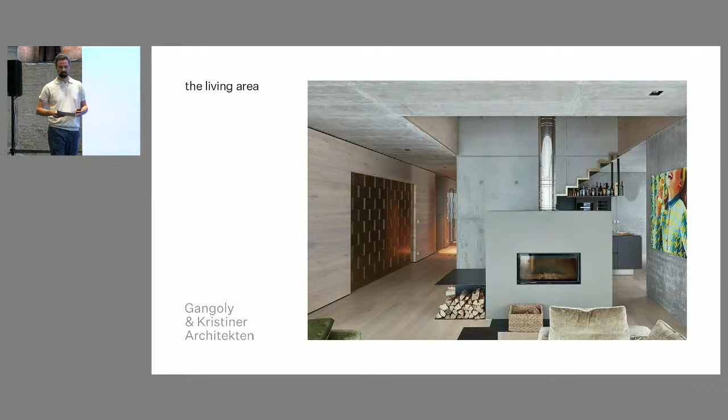We used this brushed brass contrastive material in the kitchen, as well as in the background of this double sliding door that connects a media room to the living area. It's a velvet room with its own distinctive atmosphere and coziness.

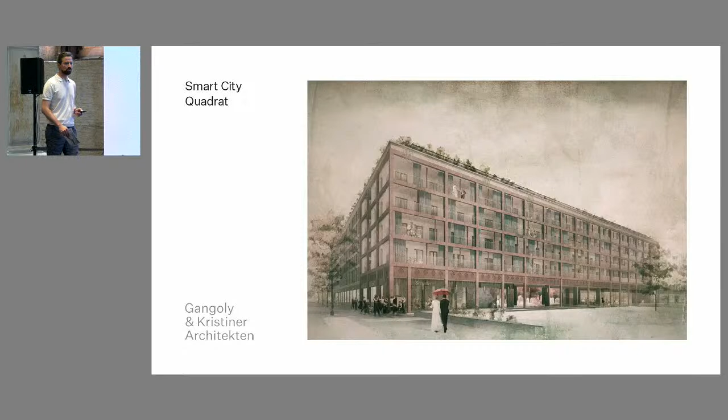And I want to finish up with this project. It is a housing project that we planned together with Ortner & Ortner Baukunst in Vienna. It is 115 apartments as part of a bigger district development.

And on the intersection of those two building parts, we situated this roof terrace for the housing community on top, a green oasis in addition to the park-like surrounding landscape. And these little atmospherical accents on the building corners are lights, two lanterns facing the street side. This image actually stands for a certain atmospherical, decorative detail that is always really important in our work, an atmospherical density that is always part of our projects.

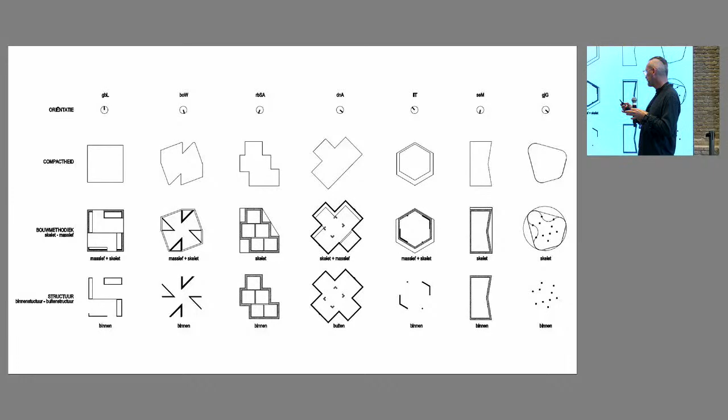So some new buildings I will show you, sustainable experiments and research, a lot of geometrical forms, houses I think BLAF is known for, just because of the different ways of constructing in hybrid structures, very compact, on a small way.

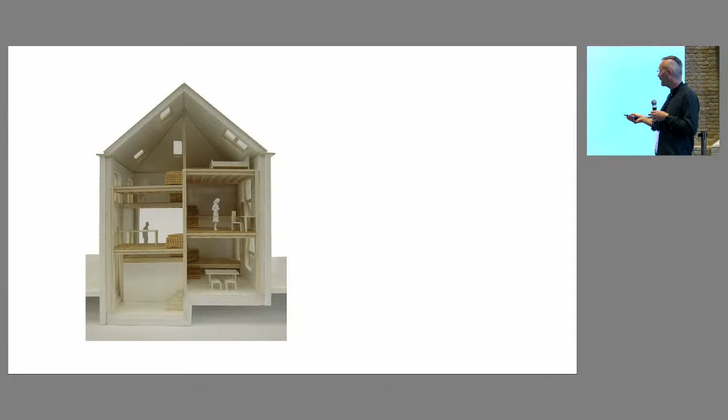Outside, inside. So brick is something special because all the passive houses were made with a really thin skin. But in Belgium, we have a lot of brick houses on the outside. So we started investigating how we can build in a hybrid way with a very light wooden structure in existing buildings, how we can make those kinds of houses ready for the next 100 years.

With a lot of research into new technology in a low-tech way. So this is an example of every house we build in a different kind of way, different ways of building a wall. So this is, we put it together in terms of years.

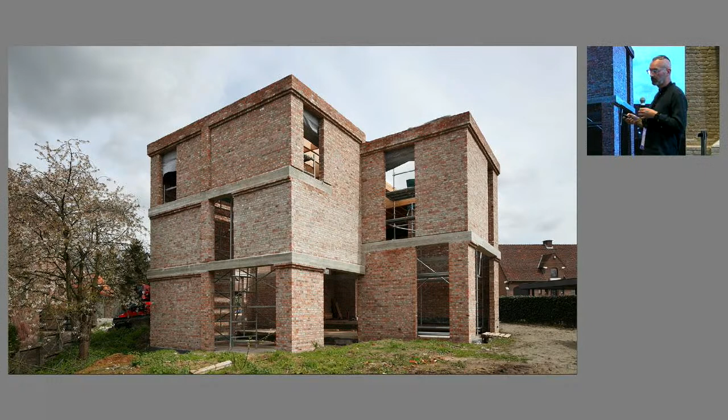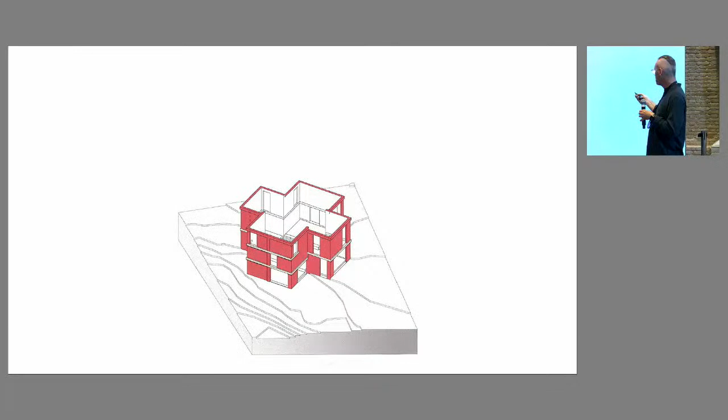And then in brick, we first started to reuse brick because there is a lot of it in Belgium. So we wanted to make a statement that not only in renovation, but also in new buildings, we can build in the same way. So this was the first one, the dnA house. We first built the wall, and then the roof, and afterwards like a decor, and in the interior, the wooden light structure.

Some other buildings with the reused brick on the outside and the wooden structure on the inside. So we come to the glG house.

It's more forest-like, beneath an autostrad. It's built in a first geometrical way because of keeping space between the trees. That's why it became the form, because of the trees around it.

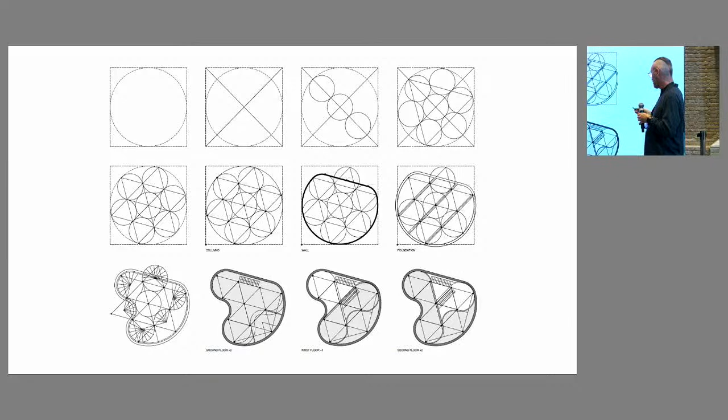And then the steel and wooden structure, a three-storey house. Also important was the brick for the acoustics from the autostrad above it. And yeah, just the plans, but the pictures tell a lot.

Just for the feeling, the outside and the inside are like the same. The man of the house, he helped a lot with the steel structure himself.

Okay, so afterwards we started to develop our own bricks, just to make the curved house also become a self-bearing structure. So we are looking now for developing bricks which carry themselves, apart from the wooden inside.

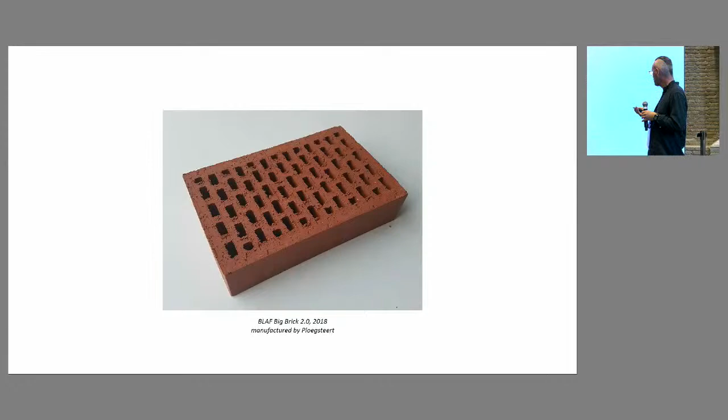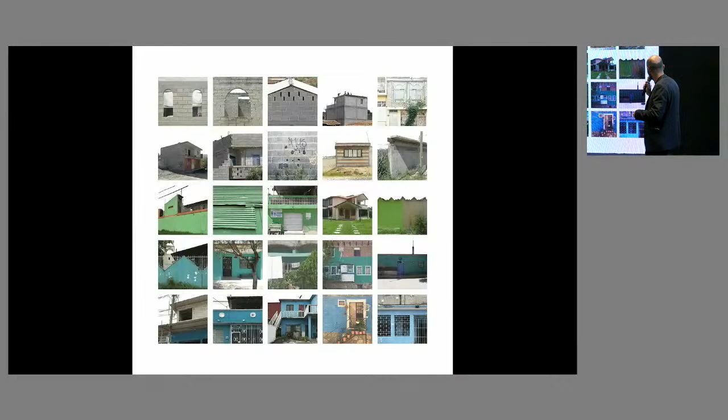I think it's fantastic the way they permeate all these ideas in design. And there's one I'm always fascinated with, the idea of stairs that are outside, so one single house can become two houses. So when you have...

It's an area in the center, and the government asked us to take 1 hectare, or 100 meters by 100 meters, and understand the territory for housing. So it's 32 offices making 32 different prototypes to re-understand the housing problem.

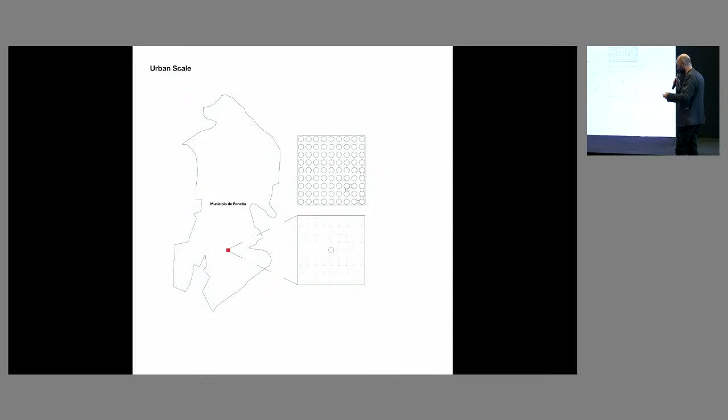So what we did in the studio is a very simple form. We started to understand that this is not a city, this is in the middle of the field outside the city. So we wanted to create a new kind of structure, a new kind of system. In this system, you can buy a piece of land like this, and then expand your piece of land.

And then this is a system that is not linear and is not a grid, it's just a curve kind of system that could actually be able to grow. So if you take one piece of this, it's a 4-meter radius, happy face, and then you just repeat this 4 times, and that's the boundary of the site.

And the boundary of the site is the wood wall, right? And the wood wall is the definition of your property and the field. So that's where you have chickens, or cows, or where you have a house eventually. But then you can buy a new piece of land and expand, and you just turn one of these modules, and then it becomes more modules. So it becomes this system.

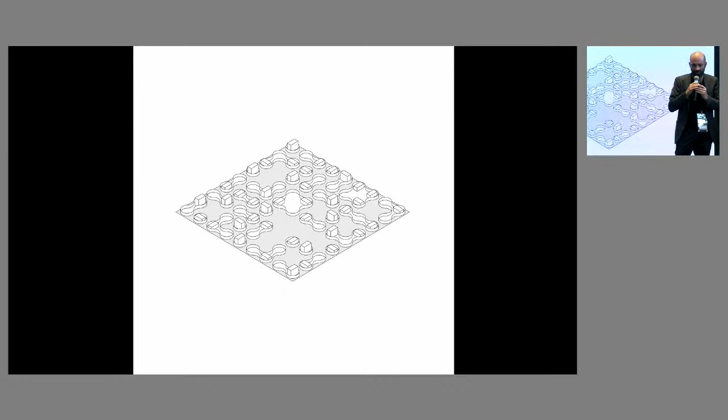And this is a system of a little town or a little village. If we take one of these different systems, you can do whatever you want. You can do 2 floors, 1 floor, it doesn't really matter. And the in-between space, between those houses, is the area for gathering, for social gathering, for kids playing, for cars even. So this is a system of a little village that we designed, just an imaginary idea of a possibility of how to build a design form of a village without having context.

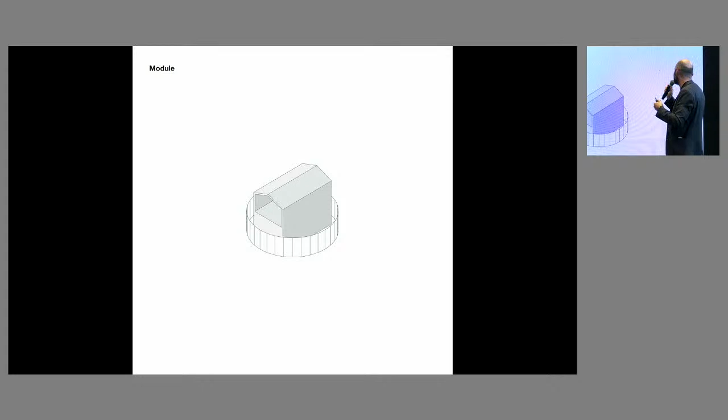So all the activities that are community activities are in between the houses, and the private areas belong to each family. So the module is this, again. And then the house is placed first floor, 36 square meters, and then you can build a second floor, and that second floor could work as storage for the field, and then later when the family grows, it could become a second floor for the structure.

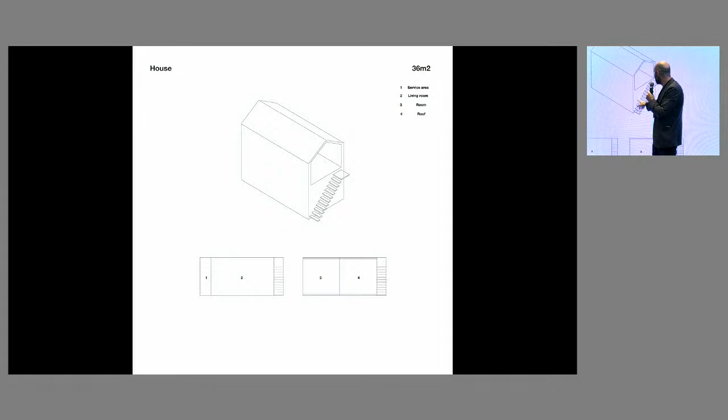So the house is very simple. It has a lower part that is all the services—bathroom, kitchen, and room—and then storage on the top. If not storage, you close it with glass, and then it becomes the second floor of the house. So that's the first floor, very, very simple, very small. Second floor.

So the idea of the stair on the exterior is because sometimes these houses are rented, or there are two families living at the same time in those spaces. So you can have an extension of the family.

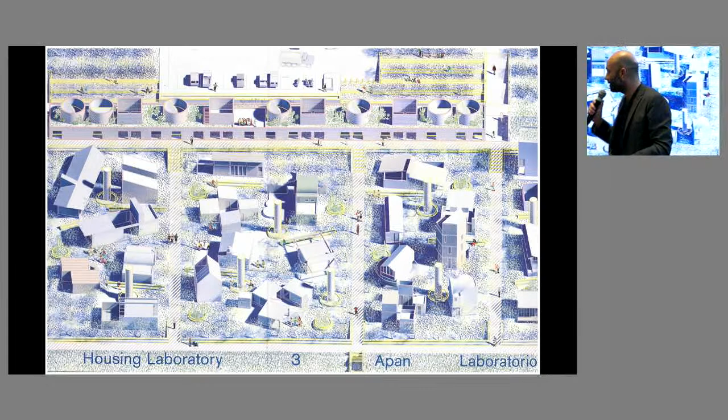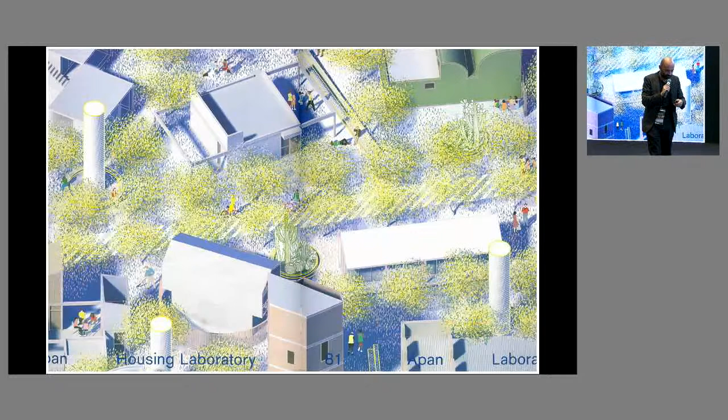So this is a drawing of all the prototypes from all the different architects. This drawing was made by MOS in Boston, who was hired to do the arrangement of all this—it's a laboratory of housing from the government. It's already built, and these are all the prototypes by different architects. Our prototype is right here, and it was built as part of a showroom for developers. That's ours, that's Alberto Kalach, that's Tatiana Bilbao, different architects in Mexico that were part of this. Some architects from Los Angeles, some from Boston also were part of this proposition.

So this is the final built area, Apan prototype campus, a laboratory for investigation of housing, and the different prototypes allow you to see the different forms and possibilities for housing. That's ours—it's a tiny little house, not finished with the round thing, but almost.

So each one of these is a prototype for social housing, right? There are 32 prototypes. Ours is here.

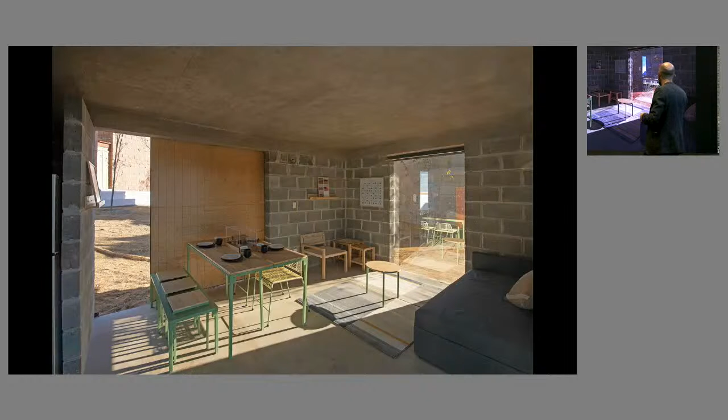So the first floor is brick, with 4 entrances to have wind crossing. And then the upper floor is concrete, the barn or storage area, with furniture made especially for this prototype. Very simple materials, very simple spaces. You open up the 4 sides and it just crosses the whole weather, becoming very simple, very passive, and very cheap. This is a house that costs around $7,000 to $8,000, or euros, more or less.

And that's about it. Thank you very much.

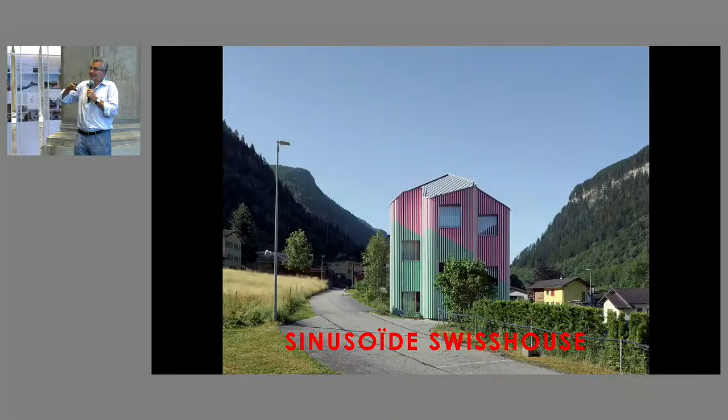Un altro tema tipico di questi paesi sono le case patriziali: le famiglie patrizie, ancora presenti in questi piccoli villaggi della Svizzera, sono le famiglie native del luogo, rappresentanti del potere amministrativo. Tutti gli insediamenti, le palazzine di questo villaggio, non sono piccole case rurali come i masi delle nostre Dolomiti, ma vere e proprie palazzine su 3 livelli, le cosiddette case patrizie, che hanno una loro presenza sul territorio.

Davide Macullo ha ripreso la presenza di questi manufatti con una certa stereometria, ma ha voluto creare una specie di dinamismo con questo impianto a croce che in qualche modo attutisce, attenua, mitiga l'impatto di questo nuovo volume realizzato interamente in legno.

È un po' con il tetto a falde, che sembra un po' la casa che farebbe un bambino, insomma, la casa quasi il modello ancestrale della casa d'abitazione. Qui si vede proprio la casa in rapporto con il campanile della piccola parrocchiale del paese, vedete come il volume appunto riprende quello delle case patrizie, però con gli angoli smussati abbiamo una continuità, soprattutto all'interno, che dilata lo spazio di questa residenza.

Ecco quindi questa idea, diciamo, dell'arte nell'architettura, qui si vede il paese nelle varie ore del giorno. Questo è l'interno della casa con i mobili tutti realizzati in legno e vedete la struttura che è in X-lam e in pannelli di legno di abete multistrato. I soppalchi sembrano quelli che un po' riprendono, dove normalmente c'è il letto, riprende proprio l'uso di abitare nella parte più alta dove si raccoglieva il calore nelle case degli antichi abitanti di questo borgo.

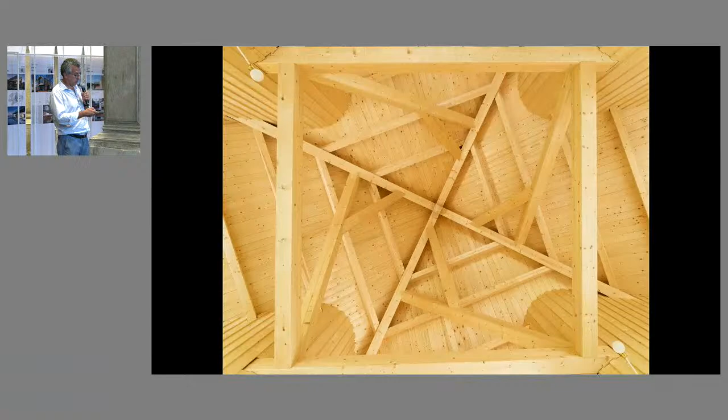Il tetto che vedete da fuori sembrava molto banale, ma dentro è inserito con un certo dinamismo perché è in qualche modo ruotato rispetto alla croce, quindi questo gioco delle carpenterie movimenta l'intera casa.

E qui cominciamo proprio a entrare nel vivo della questione, cioè di come questo progetto di chiamare gli artisti in questa piccola località poi è stato fatto proprio dalla comunità locale, dai giovani che sono cominciati ad arrivare, dal parroco, dal sindaco, e quindi tutta una serie di avvenimenti. Questo è l'architetto Macullo, ecco, visto che almeno lo vedete in fotografia, che ovviamente questi happening, questi party, hanno dato la possibilità di far conoscere in tutta la Svizzera questa attività che si stava svolgendo in questo piccolo paese.

È un luogo molto peculiare anche per quanto riguarda la biodiversità, perché abbiamo il bosco, abbiamo le radure, abbiamo la pianura, abbiamo i laghi, quindi la presenza dell'acqua del torrente. E vedete com'era la montagna in origine, cioè questo è proprio, sono i declivi che scendono verso il torrente che man mano sono stati lasciati in abbandono.

Una volta il bosco era un bosco amico, un bosco che veniva abitato dall'uomo, fruito dall'uomo. Quindi chi andava a far legna camminava nel bosco, puliva i sentieri, faceva le manutenzioni, cosa che negli ultimi 2 secoli era completamente scomparsa. E quindi vedete che le piantumazioni selvatiche poi hanno preso, si sono sviluppate e di fatto hanno impedito proprio di poter vivere il bosco.

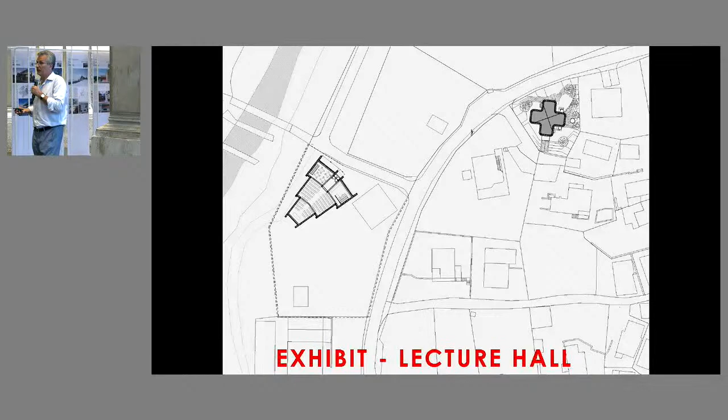Non solo, ma sempre vicino al torrente, questa è la casa che abbiamo visto prima, qui veniva creato un auditorium per le lezioni che questi artisti, le conferenze che potevano fare, non solo per gli abitanti anche, ma per chi arriva dalla vicina Bellinzona e da Lugano. Dovete immaginare che questo luogo così da eremiti, in verità si trova a mezz'ora di auto da Bellinzona e a meno di un'ora di auto da Lugano.

Questa era l'immagine proprio dell'auditorium per le conferenze, e in contemporanea, sempre lungo il torrente è stato immaginato questo progetto che è in via di esecuzione, si chiama MaciRossa, che non è altro che un acronimo: Musée à Croissance Illimitée, che non era altro che l'idea che aveva avuto nel 1939 Le Corbusier, con quel suo progetto un po' utopico di questo museo che poteva andare ad accrescersi continuamente nel tempo, ed è proprio l'idea che viene ripresa in questo paese di Rossa.

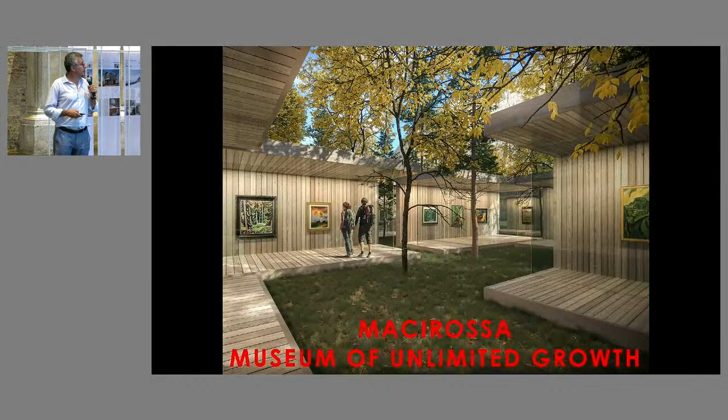Vedete, un museo che non è altro che un percorso all'aperto dove i visitatori possono guardare le opere d'arte collocate in questi scrigni di legno protetti dalle vetrine, quindi è un museo aperto 24 ore su 24. Non c'è personale, si può fruire liberamente a qualsiasi ora della giornata, i visitatori possono camminare in questo terreno sul greto del torrente per vedere appunto delle opere d'arte.

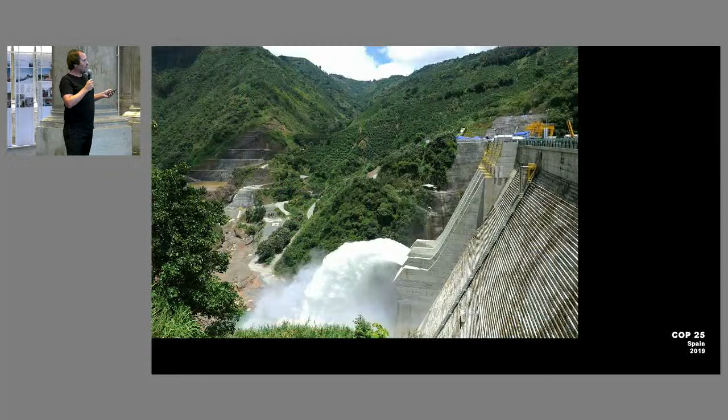One of those sectors, of course, is construction. I'm an architect by education, but we work with many different disciplines in the office. The No Footprint House is the architectural expression of this downphasing of carbon emissions, showing how you can get there and create an interesting architecture that minimizes its footprint on the environment.

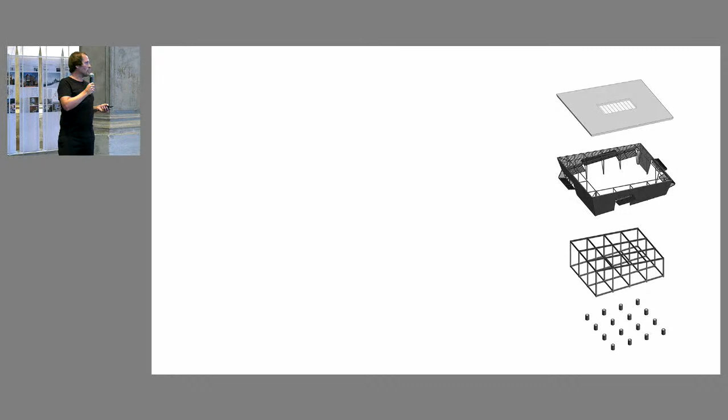It's basically a step manual we created for different kinds of material interventions and typologies that can be created, residential typologies. We created this kind of modular design system combined with an inner service core, and different kinds of facade plugs - additional furniture pieces that can be put into the double layered facade. With this, we can create these different configurations that I show over here.

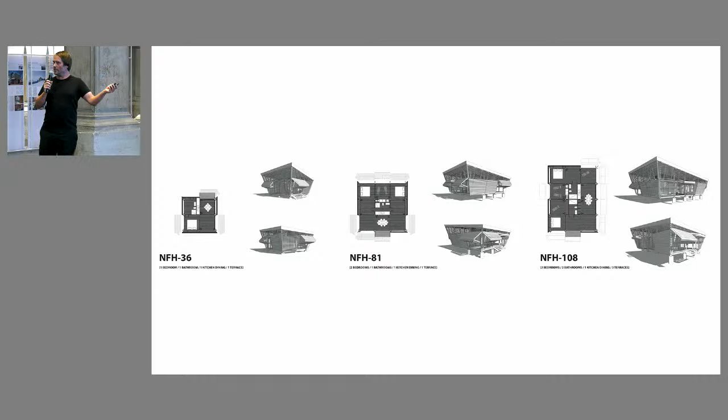We have pre-designed typologies that we call the 36, the 81, and the 108. That's basically related to the structural grid size of the different typologies. And this is the first round of renders that we did when we launched the project.

So it's a kind of architecture that opens up to its environment. That's very important for tropical architecture - to create this dialogue between inside and outside spaces and fuse the architecture with its surrounding. In order to get there, we created this facade mechanism which can open up.

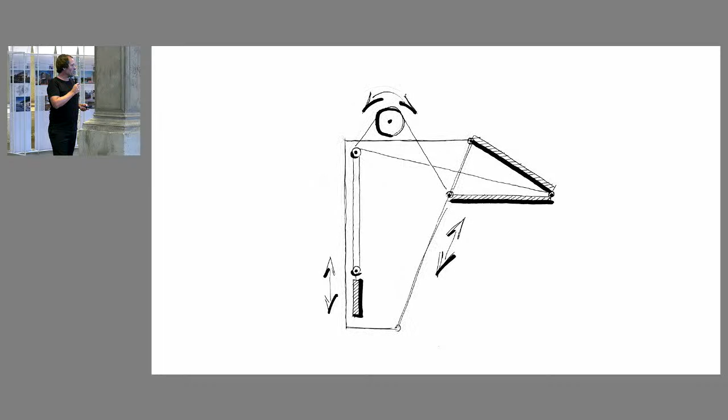These were the first sketches, and this was the first prototype of the gate. The gate was kind of one of the more complicated issues to resolve.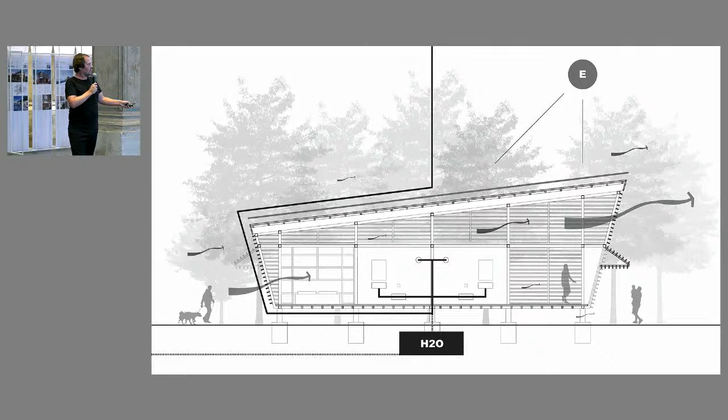Here's a section of the building which shows the principles of bioclimatic architecture that we used. It is an open construction, tropical modern architecture, based on what we call the principles of bioclimatic design. You have the service core here as this inner accessory which contains bathrooms, kitchen, laundry area, and then you have natural ventilation that defines the upper section of the building.

And here you have a detailed section of the facade. You see the relationship of the vertical structural columns and the inclined outer facade, and how we use this space that opens up between the two layers to create additional space for furniture pieces, and also simply spaces to be, like an extension of the existing space.

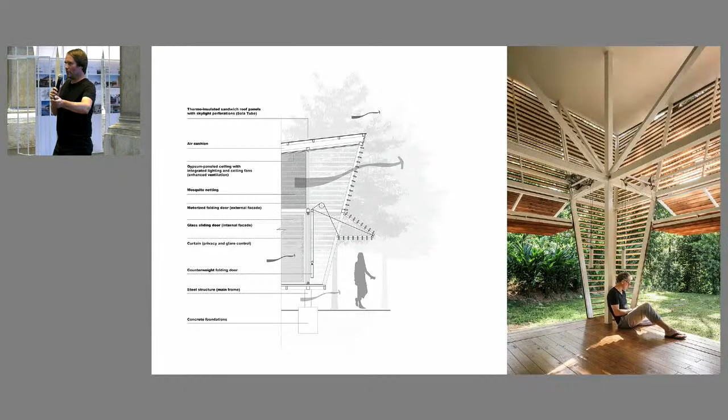So here you see how the building opens up, it works from the inside out and from the outside in, and that is the typical defining element of the structure.

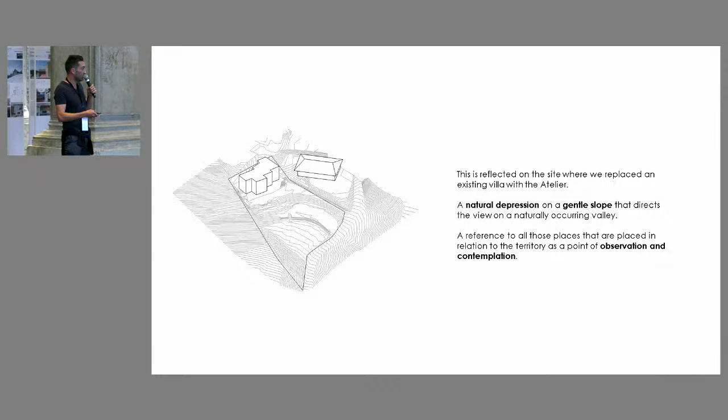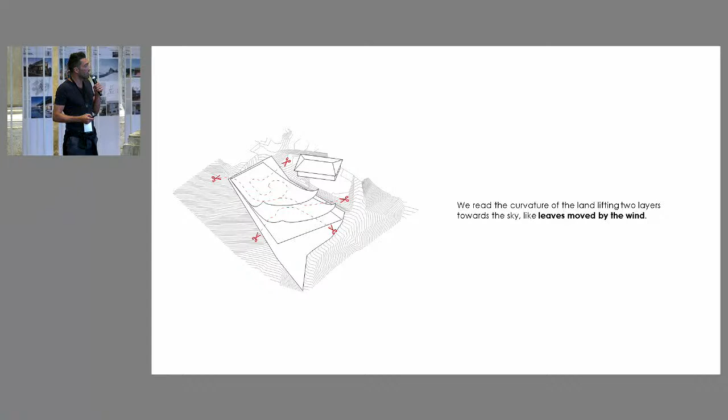If you see the site, you can really see this place is like a small depression going down. Alice asked us to renew, demolish, or do something on an existing villa. What we did is read the curvature and the curve line, lift up two curve lines, and cut the architecture into it to find the way - not only architecture, but at the same time landscaping.

What we did is put an iconic feature, normally a natural space - a cenote. This was also thanks to the idea of paying homage to the South American origin of Alice Trapp. We put this space in the core of the project.

This is both a space for working and a house. We would like Alice to stay in a centrifugal force that brings her into nature in her daily living, but when she wants to stay with herself and think about her art, it's like a centripetal force that brings her into the belly of Mother Earth.

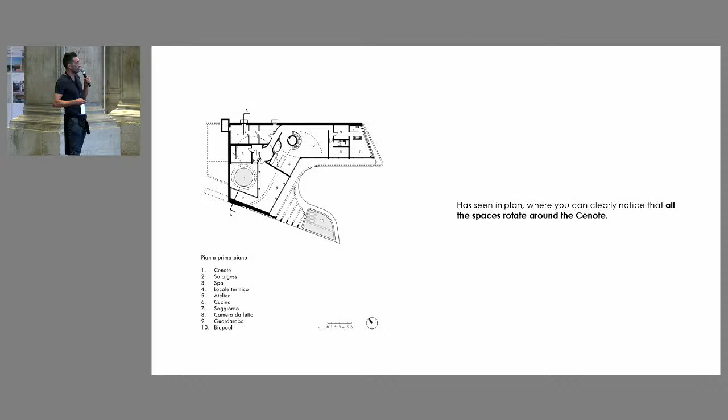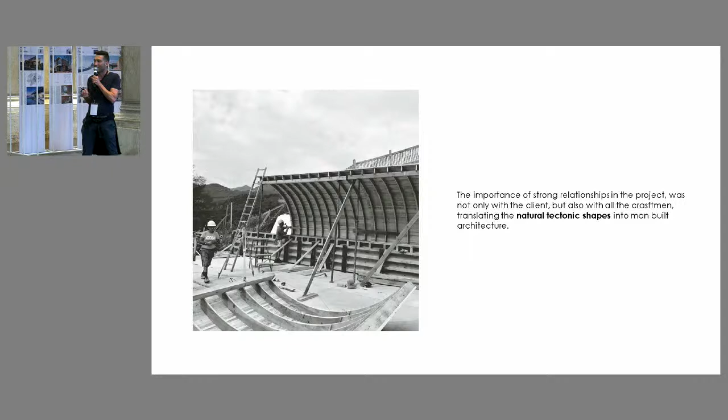I grew up as a bricklayer because I started my career on a construction site when I was 16. I did a diploma, a degree in Switzerland - you can do a degree in bricklaying from age 16 to 19. Then I did my university studies, the Polytechnic in Lugano, then the Academy of Mendrisio, and then in New York City, Columbia University. But at the end, I'm a craftsman, I'm a builder.

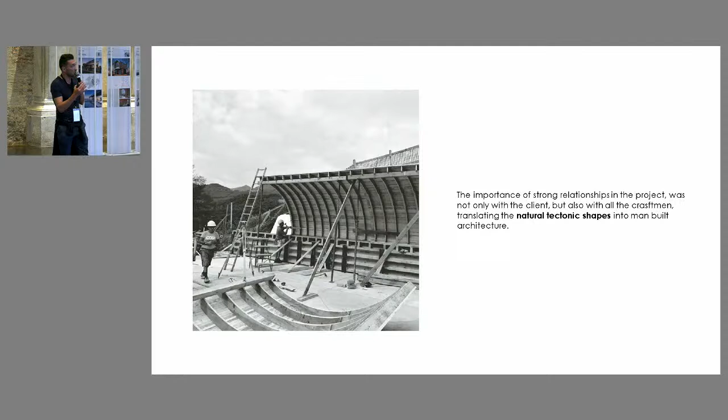The most important thing is to work with these guys every day, because the only way to translate this passion and these shapes is by staying there together with them. You can use all the software you want - here we used Rhino, a bit of advertisement, sorry - to translate our idea into projects.

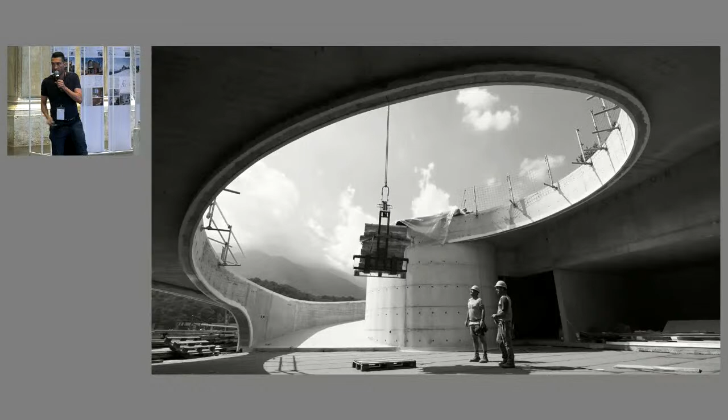What we really did was cut out 200 sections, put these sections together, and cross them together. We created more than 2,000 dots, and these dots got elevated to the sky. We really created the frameworks like ships made of wood, and then we poured the concrete inside.

I can barely hear the sound. Maybe you can pump the volume if you want. Thanks a lot.

And this is the architecture finally. It's really integrated into the landscaping. You can even see the neighbor building that it's part of the composition. This is the roof made of coppi piemontesi of our neighbor.

A big favor was done not only to Alice, but also to the neighbor, because when we demolished the existing villa, we opened the view to this valley, and this valley goes down and then up again. It's like the Greek theater, because they built the gradonate around the site. Our idea is just to go around the site and then going down this slope and then up again.

So we don't have the sea, but we have this beautiful mountain. And this is the church of Mario Botta, actually. This is the Monte Tamaro.

And we put inside a biopool, cleansed by the plants. It's like an idea to create a microclimate also in the hot summer, and using also and only friendly material and heating system that can help us to be as much as possible sustainable.

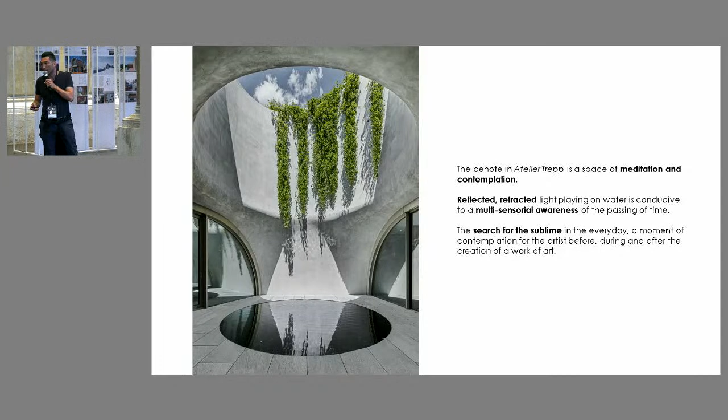Looking at the clouds movement, the birds twittering, the movement of the jasmine that brings all the natural perfume into the space. It's like a search of the sublime in the everyday, and it's the starting point for her, putting in the fourth dimension, that is time, like a sundial that detects the various solar declinations before, after, and during one works of art.

Thank you really much.

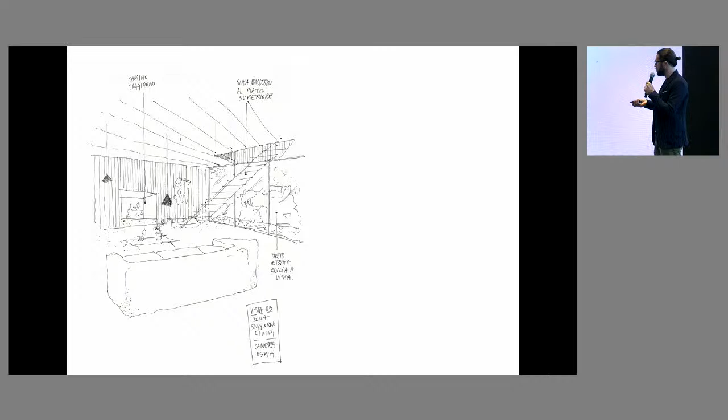And so we were starting bringing the rocks into the house, thinking how to transform an existing building that was not a dwelling into a warm dwelling. So bringing inside wood, bringing inside new spaces. And we went together walking around and seeing this beautiful landscape that is around there.

And he fell completely in love. When he saw this village that is just next to the house, he said, I want to be part of this landscape. So everything started, and we started by analyzing the existing building as it was before.

You can see that it was very empty, nothing, just space for animals and for the grass. So we were starting in this very small and tiny cabin, and we had the opportunity by moving volumes inside to create an extension. This was actually the building inside with the rocks and the beauty of this, and the hand of man next to nature. So we wanted to keep something of that.

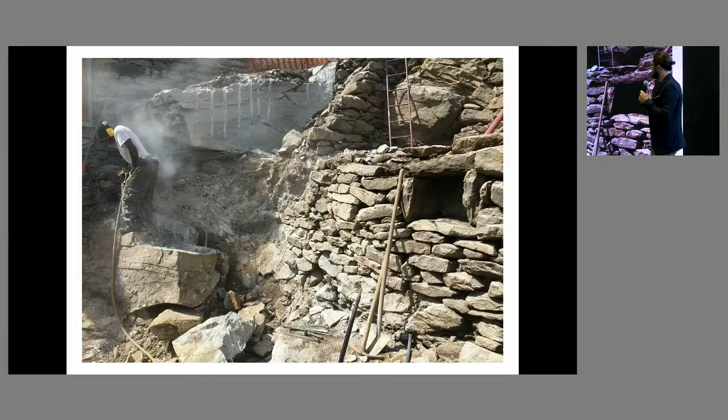But of course, the mountain is the place of compromise, and we couldn't reuse completely the building. It was made of stones, only stones, dry walls. So some parts we could reuse and take, and basically we had a lot of intervention on other sides. There was a mandatory regulation in the valley that was very strict on how to reuse the material, and it was a little bit hard at the beginning.

So we were analyzing a very light extension of the house to create an entrance and a living room, which finally changed a little bit the proportion and the materials. Following the restrictions outside, we were using the stones even for the extension. Here you see again the essence: stones, wood, trees and rocks. By using this concept, we had the possibility to change a little bit the spirit inside and the approach.

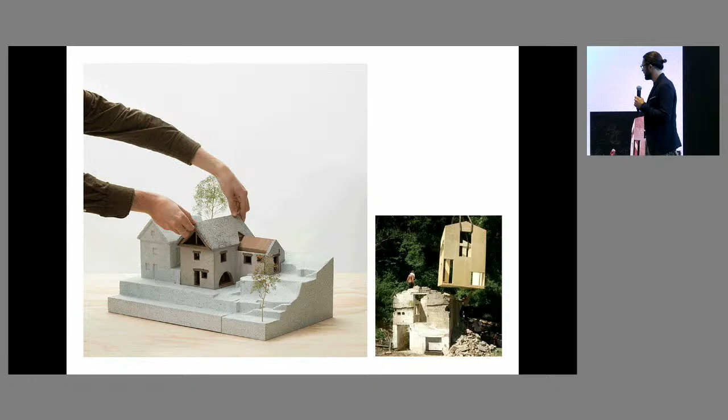So we use the concept of the box in a box, even for thermal insulation requirements, and of course seismic requirements. I'm not going to spend a lot of time on the plans, but you see there is such a complexity inside to make all the functions work together.

The new extension is the entrance and a small living room, and the idea is that we related all the openings to see the peaks, to see the mountains, to see the valley. Then next to the rock, all the functions that needed less light, like services and toilet.

This guy is Alberto. He's a master, following us now in another project in the mountains, and he took on the hard work of dismantling all the house and then building it up again, reusing all the stones.

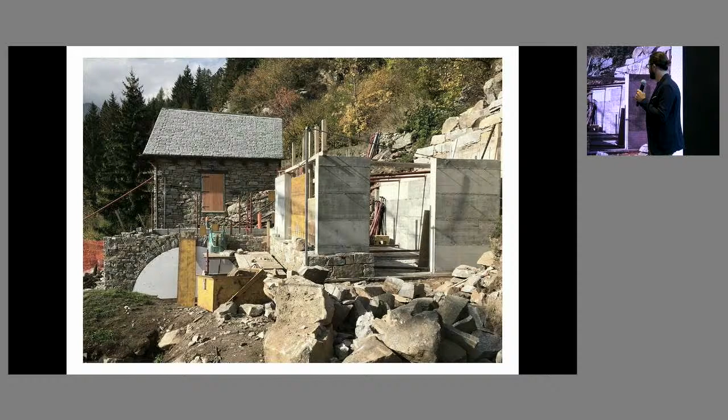So he was an artisan with heart, and of course we used a lot of concrete, and the seismic requirements were very tough. So we had to transform the building a lot. In parallel, there were construction technical difficulties, but in mind we always had something very clean, something very soft for the interior.

And this is the final result of the house, how it looks outside, reusing the pitched roof in stones, reusing the old techniques. It was required, and it was something important for us, something interesting.

So by going down, we found a very large arch in the existing building. So we decided to reuse it to see the ancient well, and we reconstructed it by reusing the old technique of the stones. This is how it looks now.

So the function changed when we saw the arch, and we decided, with the client, to put the master bedroom downstairs.

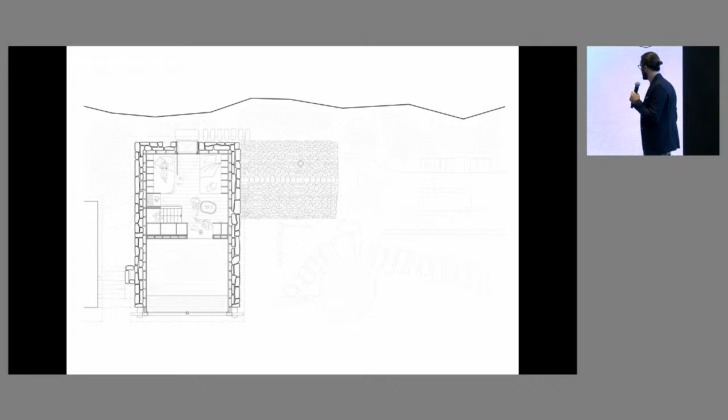You will see later. By climbing up to the last floor, the one we moved a little bit with the volumes, we had the possibility to put a little playful room for the kids. Even if it was not completely allowed, we can say this is a laundry, but we played a little bit with this game. And again, tympanum, archetypal openings of the typical stone buildings there.

So we tried to reuse all the techniques, in this case by putting a glazed tympanum. This is the comparison of how it was before, and then how we got this tympanum inside, trying to bring natural light in, because all the windows are quite small, and it was quite important to bring natural light in.

And here in the section, you see the complexity of the levels, the service area next to the rocks with the bathroom, and a little bit the room that with the windows looks downstairs.

So getting inside, this is the entrance with the living room, and you can see that inside it's completely different. It's warm, with natural birch plywood and materials that allow you to have this contrast. We played with the contrast. We found it quite interesting.

And this, of course, is where the client wakes up every morning and looks over the valley, with the little building of the well outside.

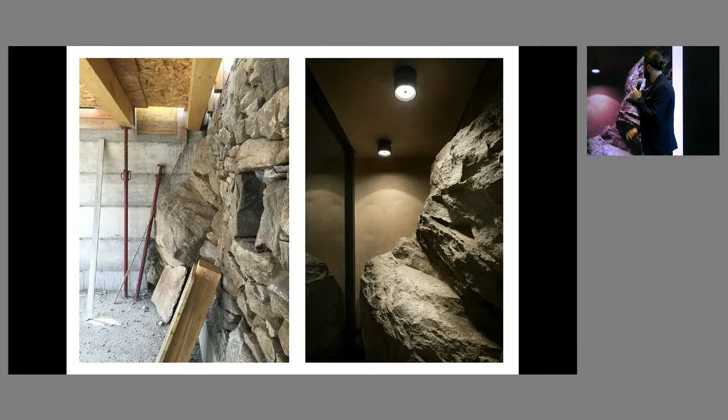Going up, this is the very tiny room for the kids, and the kids have this window that receives light from the tympanum, in the game of moving volumes, and they look downstairs. Of course there is glass so they cannot fall, but they look down to the parents, and they're quite happy with that feeling of playfulness in the house.

So, compromise, we said. The compromise is using as much as we could of the existing rocks and stones, and this is what we did. For example, we had all this in the shower, in the bathroom. And basically that's it — this is the final view of the house.

I'll spend one last word. This is Atoma. Atoma is a Greek word that means people, and we're quite happy with that. It's indivisible, as it means atoms, and we're very proud of this.

Now the people grow a little bit. This is our office where we practice a lot with materials, with models and stuff. This is one of our incredible guys, and this is Atoma.

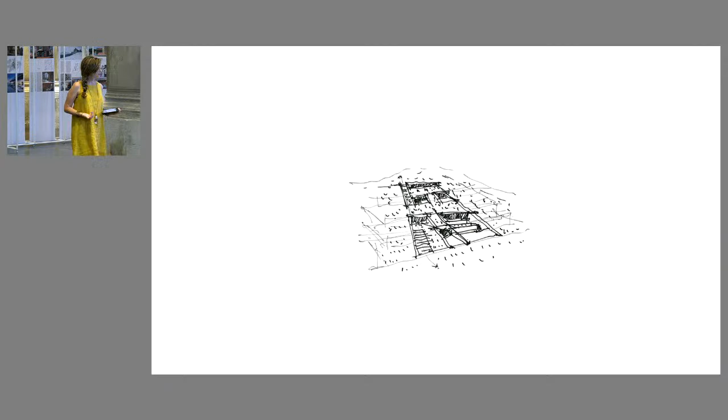Uncaved Residence is a project that we designed but also managed its construction. We moved to the island for 2 years, so I can say that I'm really attached to this project and very proud of the outcome. I will try to be brief and explain the most important things.

Uncaved is located on Serifos Island in the Cyclades, on a rocky cove just above sea level. The design was the outcome of a very thorough research of the suburban landscape. We tried to avoid any possibility of just reproducing the stereotype of traditional Cycladic architecture that we mainly meet in the settlements. On the contrary, we aimed at a more contemporary and daring architecture that declares its presence, but at the same time is an organic part of this landscape.

We used and embraced the Cycladic concept in our design. One of the most important concepts was the protection of the inhabitants from the strong winds in the area. Like that, we designed this project also as a shelter. It is located on a plot with an amazing view, but it's openly exposed to very strong winds, and this led us to the decision of drilling into the slope instead of arranging the spaces on the ground level.

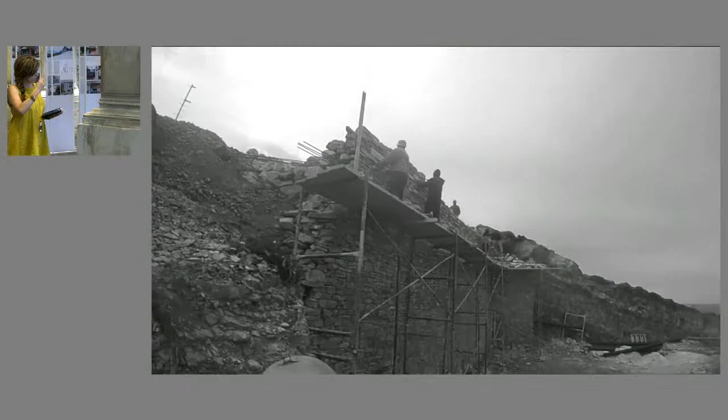Also, the bioclimatic approach of the design finds its roots in traditional Cycladic architecture with its planted roofs. With our passive and active techniques, we minimize the energy needs of the house. Another key concept was the use of local materials, such as stone that we directly excavated from the plot, but also metal, which we used as a clear reference to Serifos's very rich mining history.

The sequence of spaces creates a narration full of emotions and surprises for the inhabitants. In the beginning, when you approach the house from above, the only thing you can see is this linear stone wall parallel to the line of the horizon. Then the guest dives into the earth through this emblematic staircase, and gradually the spaces of the residence and the inner patios are revealed. At the end of the route comes an emotional explosion when you finally witness the breathtaking view of the Cyclades and the neighboring islands.

We filtered the light through perforated and reflective surfaces, which intensifies the emotions further and constantly changes throughout the day — from a very natural feeling of daylight, transforming into a more seductive environment. The use of raw materials, such as stone, exposed concrete, or wood, intensifies the feeling that we are inside a natural cavity. The roughness of the materials is combined with an elegance in the handling of details, creating a space that is simple yet warm.

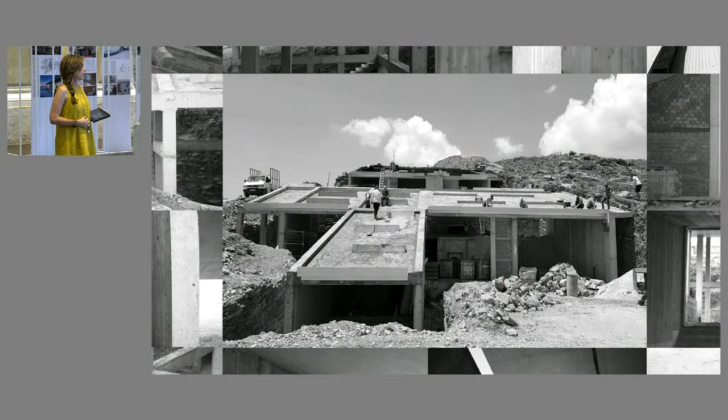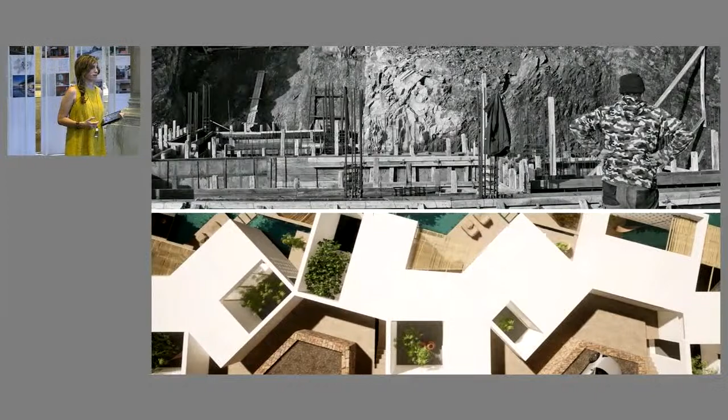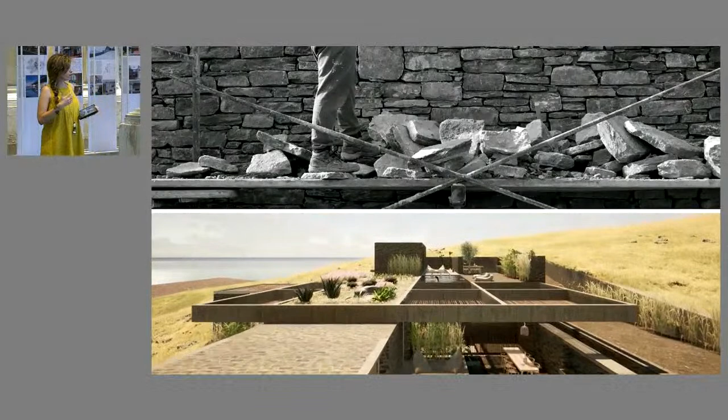Our approach integrates research, architecture, landscape, advanced computational design, parametric design, interior design, visual arts, and construction management. Our work focuses on a constant effort to weave traditional concepts into a modern vocabulary. Our design principles involve the reinvention of traditional typologies, the merging of structure into their environment, the modulation of light, the promotion of craftsmanship, and the use of new technologies, all in order to create a fresh, but above all, humane architecture.

I selected for this short time to briefly present you with 3 of our projects: our first one, built in 2014, and 2 of our latest ones.

The first project is a residence on Serifos Island, designed as a composite terrace on a steep slope. In Cyclades, the landscape is dominated by a series of stone walls called pezoules, whose purpose was to maintain the soil and convert barren lands into cultivated areas. This element of the stone walling is transformed into our main tool of composition, which defines the enclosed spaces and courtyards, gives protection from the wind, and frames the views. As a result, the landscape has maintained its unique morphology, and the house naturally follows the flow of the slope.

The second project is Centro Ottico, completed very recently, a renovation of an optical store in the center of Athens. Here, the idea was to remove all the display and infrastructural elements and use the product itself as a structural element whose repetition would create architectural space.

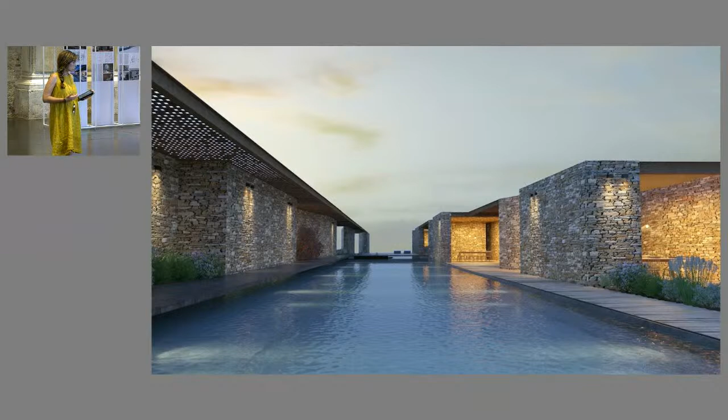The third project is a house on Paros Island, now under construction. This house was designed on a plot next to a traditional shipyard. On the island of Paros, ancient shipyards called Neosoikoi were found scattered all around the island. Those were artificial slots on the coastal rocks that served the loading of boats with marble. In our design, the basic idea was a clear reference to this very long naval tradition of the island.

The composition is based on a very simple idea. The house is placed inside an elongated pit created by two retaining walls, and water rushes into this pit as it once did in the ancient shipyards. It dominates the communal spaces of the house. From the exterior, the building is assimilated into the landscape, imitating a fence, or let's say, a remnant of a building.

To sum up, I can say that our projects are based on very different concepts, but there is a strong affinity amongst them. This affinity lies in the careful reading of the context of each project, in the clarity of the idea, and in the persistently asked question, why, which precedes every line that we try to design.

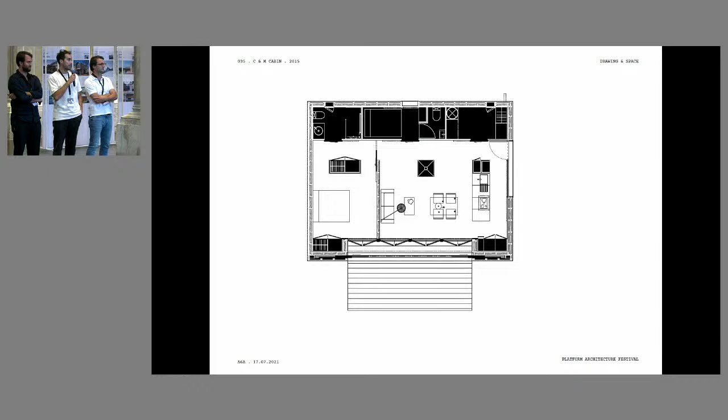Another subject we have 2 minutes to finish is about the drawing and the plans and how we imagine all these kinds of spaces. So what we work on in all the houses is main spaces that are functional, because on the other side you have spaces like here in the black frame, who serve all the main spaces. Here in Pontaillac, we did the same, with the main spaces below on the plan, with the terrace, and all the functional spaces like the entrance and the access to the garage and the toilets, etc. on the other side.

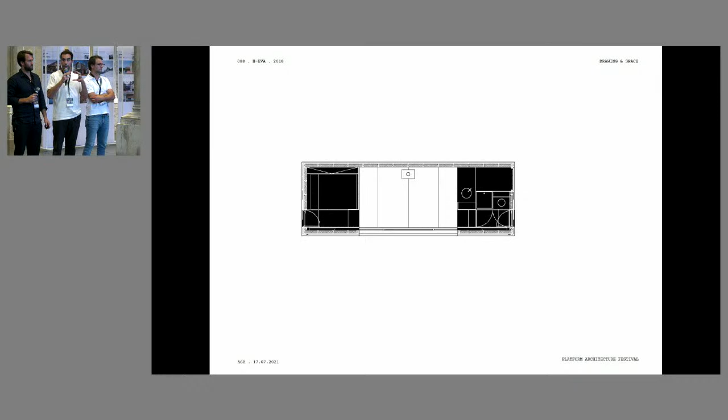Pessac is the same way. With this section, we show that the in-between spaces are also one of the questions we always try to answer. In Eva, it was the exercise of fitting all the houses in a really tiny space, and that's what Michel was explaining before. And this house is one level on the street facade, and 3 levels on the garden part.

So yeah, I think it repeats a bit, but it's always this relation we like - inside, outside, the material from the site, the context, working with people, very craftsman-like, and doing a lot of details. We like small details in architecture and working with few materials. We always find it. So it was interesting to do this work to present you these 5 houses, because for us it's like an introspection of the work we do on the houses.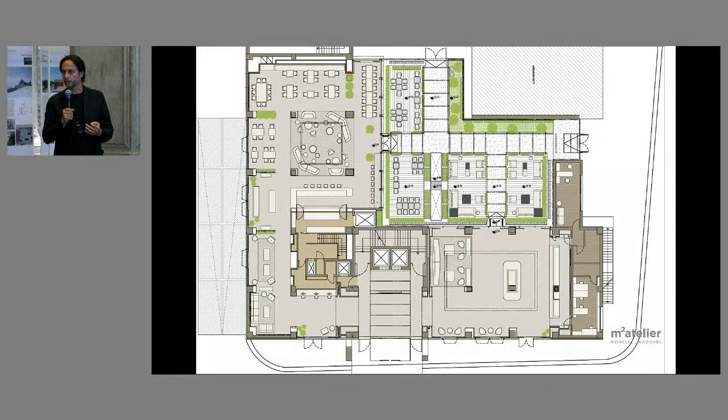Today the Hotel 4 Points by Sheraton, as Mariana said, is very interesting because it's local, and this was a competition. Our client founded this managing company called D Hotels, which has as its purpose to regenerate underperforming hotels, having design and beauty at the core of the values for the client experience.

This was an old hotel, so we were facing not only the problems of how to regenerate an existing structure, but also how to stay within a certain budget. As we all know as architects, it's quite often to go over budget and over time. This was actually a very good example - we went under budget and under time, so maybe the first time we were within everything.

As you can see, our role was very clear: we had to make a hotel that had no identity into something with a youthful, playful atmosphere, for clients of a 4-star hotel, as you can imagine.

So starting from the entrance that you can see, we had this one piece of art - a pin art panel with huge dimensions, that is actually a very fun place where people like to stay and do their photos for Instagram. Yes, it's an Instagram point.

Mestre, for who doesn't know where it is, is 10 minutes away from here. Location-wise it's very good - this is a 4-star hotel, so very affordable, 10 minutes from here, with all the space you want instead of being cramped into little Venice. But of course it also has a conference center. It's 168 rooms, 2 restaurants, a gym, a spa, a swimming pool.

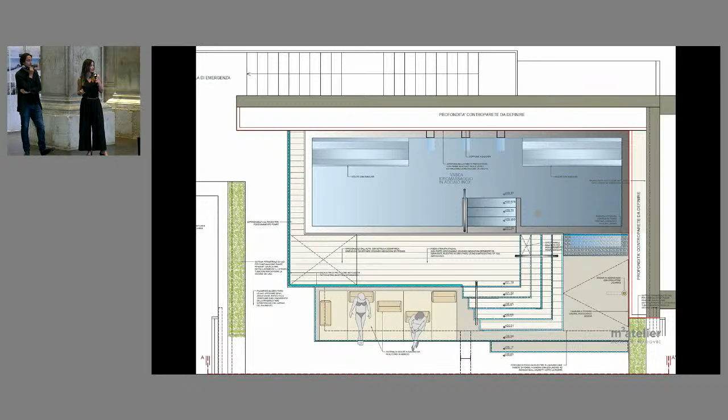All this area is dedicated more to relaxation, continuing here with the same materials you saw on the floors below, from massage rooms to the spa, sauna, and everything concerning the sauna. This is the big steel pool, and this is part of the gym, and I think that's it.

And we were precise. Thank you, thank you so much.

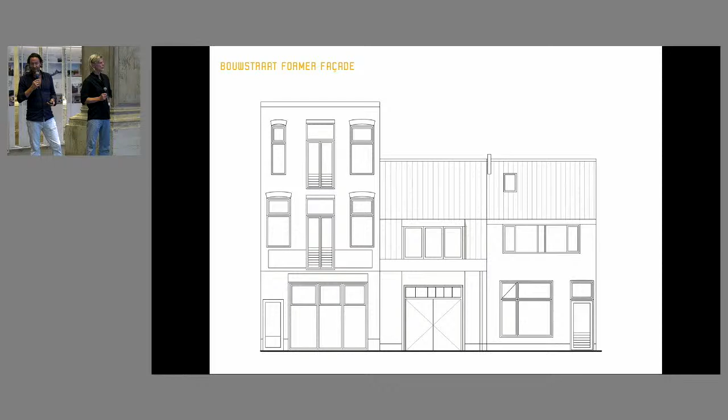Like the kind of inspiration of the existing housing, a transformation into a new kind of house based on the historical themes, but then made super abstract.

You see an image of the neighborhood, and this was actually the first facade drawing we made. You also see here the themes from existing buildings in the street, the working class houses, very traditionally built up. We transformed them into an abstract facade where the same themes are represented in a very different way.

Like the big window on the ground floor, the rain pipes, the same structure, the roof, the dormer on top, but all in a different interpretation, a very modernistic one, made fully out of corten steel.

Here you see that in relation to the other facades, the same themes are reinterpreted. You can see the lines are taken over, where the roof starts, and it's also one of the buildings in the street that stands out.

The corten steel also has the same color as the brickwork in a sense. So it's modern, but at the same time it has a great patina, and it's getting nicer every day, I would say, and connects more to the environment every day.

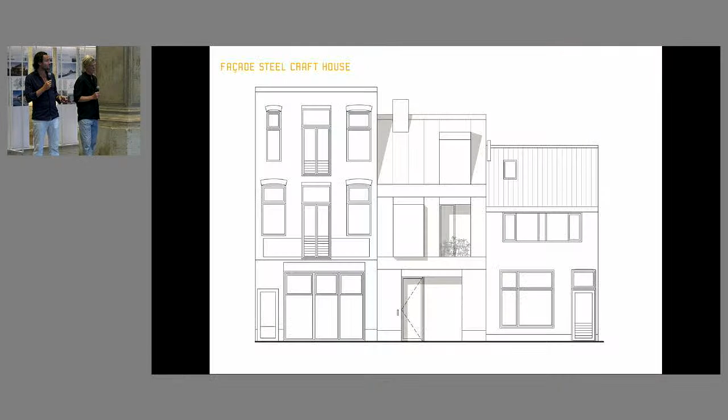Here you can see the drawing which we made and the final result. The patina of this steel is changing every day, like I said. You see here all the different themes, the dormer, the roof, and what we did with the plasticity of the rhythm of the facade.

Roland made a piece of art of this by himself and with friends, and made a super special project of it. You see more details of the corten steel, all made by hand.

And also on the inside, a kind of warm wooden interior, which reflects and creates a contrast with the steel outside facade - warm and light interior. You see how it was.

This was an in-between house, which we bought ourselves. We got the idea that we needed more space, so we drew many designs to top this house up with an extra floor. These designs were exciting, but had no real connection or relation with the rest of the buildings and houses in the street, nor with the neighborhood.

So then Marnix van der Meer stepped in from ZEC Architects, Bart's colleague, and he drew this corten steel facade, which was my business at that time - to realize architectural works with metal. So it was an easy project.

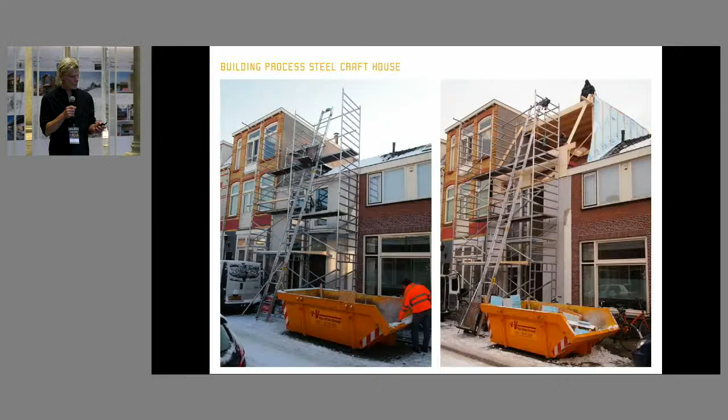You can hardly imagine that we lived in this house. I made on the ground floor a plastic quarantine room where we put our bed, and our kitchen was over there, and the bathroom on the first floor was still fully operational, so we could use that. But you can see that we built a roof over the other roof, which was still existing, and with a lot of help from our friends, we demolished the existing roof so we could go on with the rest of the building.

It was no job which was done in a very short time, as I organized and did it mainly by myself with a lot of help. You can see on every picture coming up now, friends of mine who are respectively architects, carpenters, craftsmen, or just friends, and they helped us with realizing this task.

The neighborhood could also see that there was something going on, and it was not realized in a blink of an eye, as when a building company was engaged to realize it, but it took several years. The interior mainly was due to that. But it was no instantaneous result - it was a gradual work where our neighbors on the opposite side of the street could see every step.

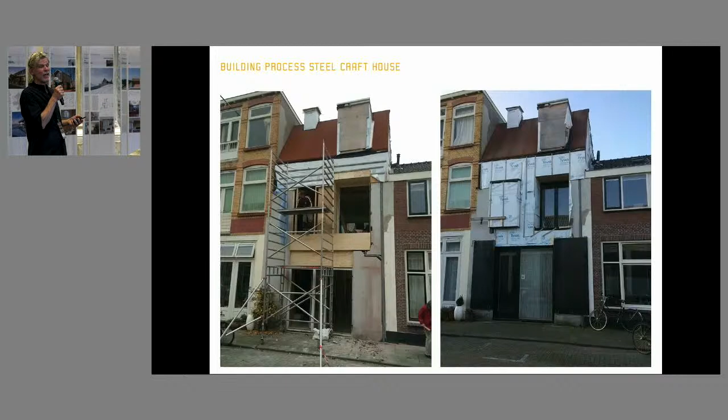Some further steps in the building process, and some work done by myself in the workshop. Some further steps nearing completion.

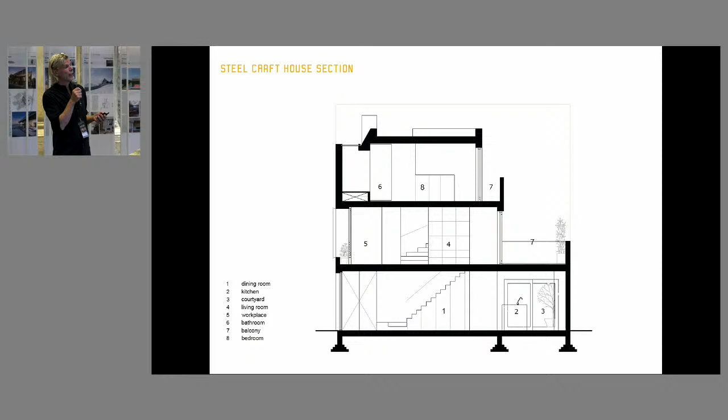And here a cross section of the layout of the house. I didn't have any drawings fully designed for the interior, and I proceeded on doing a kind of one-to-one work with cheap scrap building material, which I cut and put together to realize a prototyping of the different elements in the house - like, for instance, this stairway, which I personally find very attractive. The satisfaction comes from this kind of designing, making different functions into one element.

This stairway is a cupboard, a stairway, of course, and a storage place, and a nice snug area. I had a sitting cushion in the corner, and it was my personal private space, and you couldn't see it from the street.

Some other views. The house was very light because of a fully glazed facade, or nearly fully glazed facade, and sliding doors at the back.

Also, you can see here the combination of different functions of the interior - a supporting wall which doubles as a cupboard, and the stairway was so extended that it was nice to sit on.